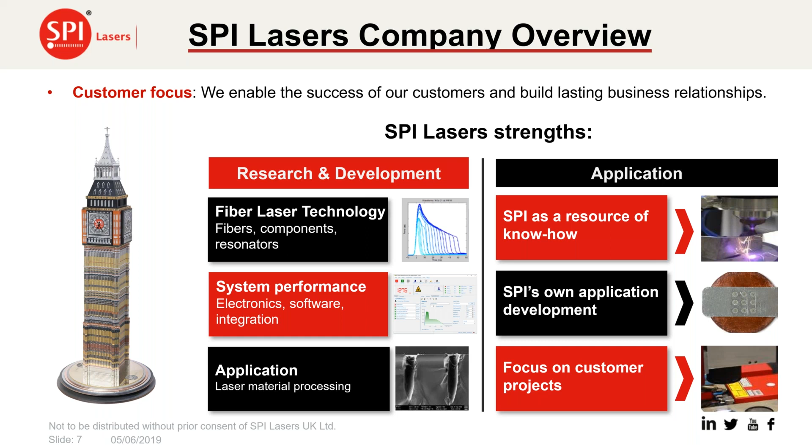Today, we're going to be focusing on the CW side of the business. There's also another large part of SPI's business which looks at pulse lasers, mainly for marking and engraving. But here we're going to be looking at the CW side of the business, particularly where we're focusing on cutting, welding, additive manufacturing, and some micro machining.

And the QUBE product range, which was introduced in 2017, has got a number of parts to it. We've got water-cooled lasers from 300 watts up to 2 kilowatts in a 19-inch rack format, and then air-cooled lasers in a similar format from 100 to 500 watts.

But when we go to a floor standing cabinet, we can take the power levels from 3 kilowatts up to 10 kilowatts in our current product range. And just as a starting point for what we're looking at today, we have always made those lasers with a number of different fiber diameters, and the different fiber diameters have a slightly different beam profile coming out of them inherently, and also a different beam parameter product, which I'll just mention later on.

So we've already had lasers with a fixed beam parameter product, but one that could be selected from the range that was available as options at the time the laser was purchased.

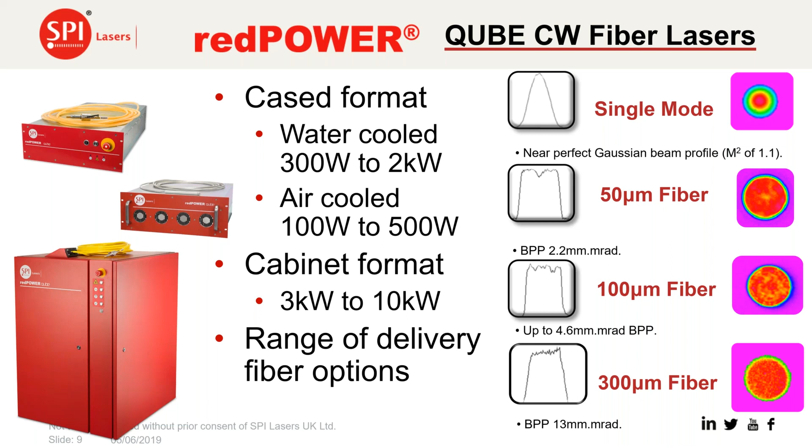So some of the advantages that differentiate our laser maybe from other ones. When we look at the higher power lasers, then we have an inbuilt pierce detection feature inside the laser. Pierce detection, when you're cutting, allows a real increase in productivity, something like 10 to 15% against a system with no pierce detection.

We have built back reflection protection as standard into the beam delivery fibers that we use with our lasers. We call these PQ. They're a QBH compatible mechanical fit, but with extra features to give this enhanced back reflection protection.

Inside the lasers, we also have pulse generators, so we're able to do pulse shaping and high-speed modulation, which allows a lot of fine machining and also gives great control over welding applications.

As I mentioned, we have got a range of mode profiles or beam profiles from the delivery fibers, so there's already a choice, a fixed choice, to optimize the process performance. And what we're looking at now is an option for real-time selection of the beam profile.

Finally, on the high power lasers, we also have a low power mode, which sounds a bit strange. When you've got a 6 kilowatt laser, you might want to cut something out and then mark it just with a part identification. At high power, you normally can't control the laser low enough to allow that marking, so we have a special feature that allows it to run stably in a very low power mode, and that's found to be quite useful.

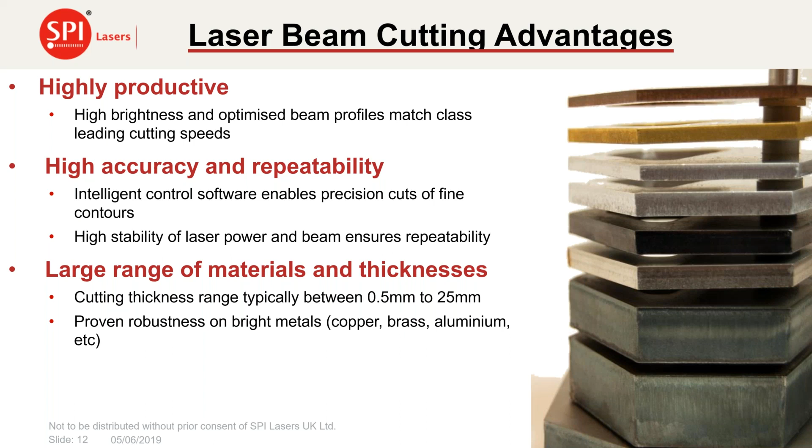Why do we want to use the laser for cutting? Well, first of all, the laser has a number of advantages when used in cutting, and most of these are now well known, and lasers are fairly ubiquitous in laser cutting applications. But they allow great flexibility to address a range of materials and thicknesses of those materials, so that the laser is becoming very well used.

And that's really a point which we're going to come to more and more through this discussion today, that what is a good cut, and what is the limit to your cutting capability, depends a little bit on how you define the edge quality that's acceptable for your process.

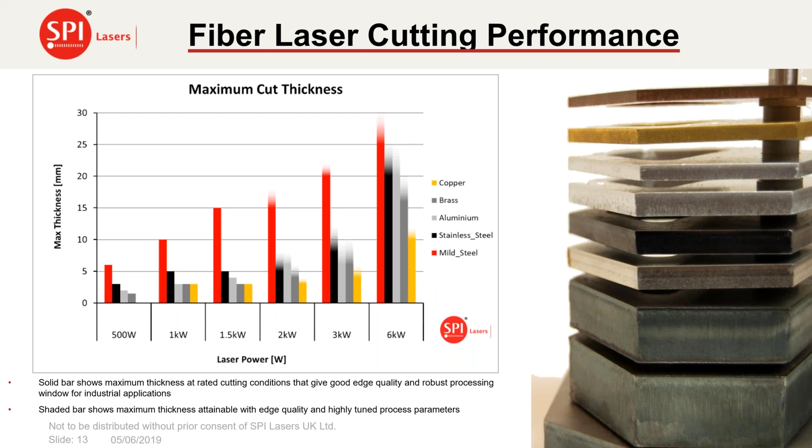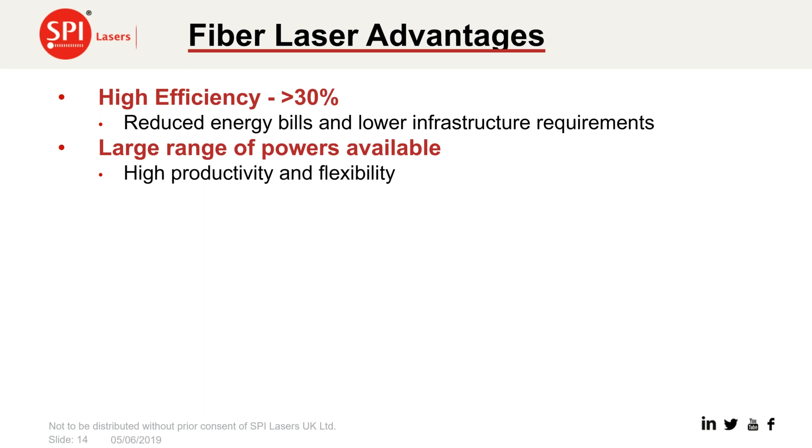But fiber lasers in particular, coming into cutting, give us, compared to other types of lasers, really high efficiency. If you think about a neodymium YAG laser, that would be about 3%. You may get up to 10% with a CO2 laser in terms of efficiency, but a fiber laser is easily at 30%. We've got now a large range of powers. As we looked at, we can go up to 10 kilowatts and higher now, but yet there's still lasers down at 100 watts.

Fiber optic beam delivery is very good for integration. It's flexible and easy. And obviously with a fiber laser, it's kind of inherent in that the beam starts off in a fiber - you might as well keep it in a fiber all the way through to the workpiece. And we can get some very good beam qualities. We saw earlier that it's possible to get single mode lasers at the diffraction limited performance, and now those lasers are up into the kilowatt regime, but yet they're still quite small compared to some of the older types of lasers.

The fiber lasers have a much smaller footprint and fit much more easily onto shop floor environments. And the operational costs are low for a fiber laser - there's no gases being used up, no flash lamps to replace. And these days the capital costs are dropping as well, so there's a very good business model for using a fiber laser in very many applications.

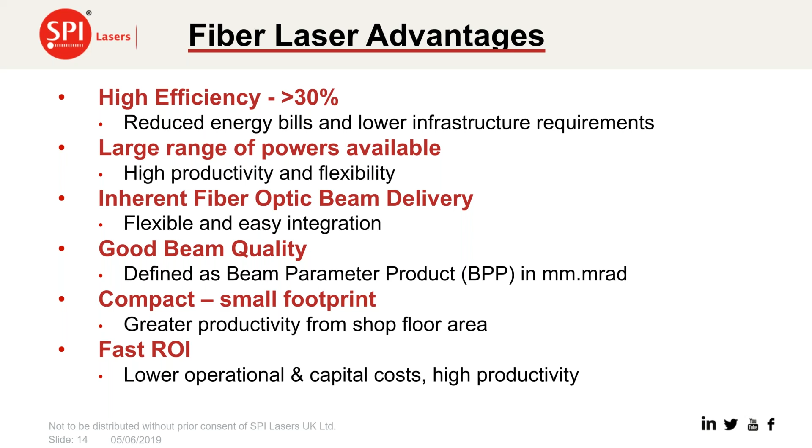But in terms of laser cutting, the perceived wisdom was that CO2 lasers would be the laser of choice. They've been used for many decades for high power metal cutting, although recently fiber lasers have been encroaching on their market, and it's about a 50-50 split between CO2 lasers and fiber lasers, probably just slightly in favor of fiber lasers - more of those are going out on new cutting systems. But fiber lasers give a cutting speed advantage over CO2 for thin materials, but were not considered to give a very good edge quality in the thicker material.

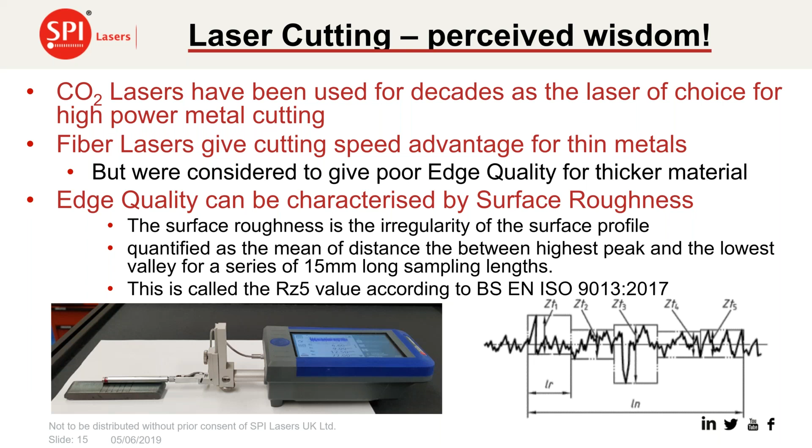So we did some work looking at different thicknesses of material and trying to cut them in the best way with various beam qualities, various beam parameter products of the laser.

The beam parameter product for a laser beam is given as the product of the diameter of the beam at its waist and the far field divergence, and that's something that's called the beam quality. The BPP by convention uses the radius of the beam and the half angle far field divergence, and because it's the multiplication of a distance in millimeters and the divergence in milliradians, the units are millimeter milliradian. So as you go to a beam with worse beam quality, the number gets bigger, and better beam quality, the number gets smaller.

So a diffraction limited beam for a fiber laser would have a beam quality, a BPP of about 0.35, something like that.

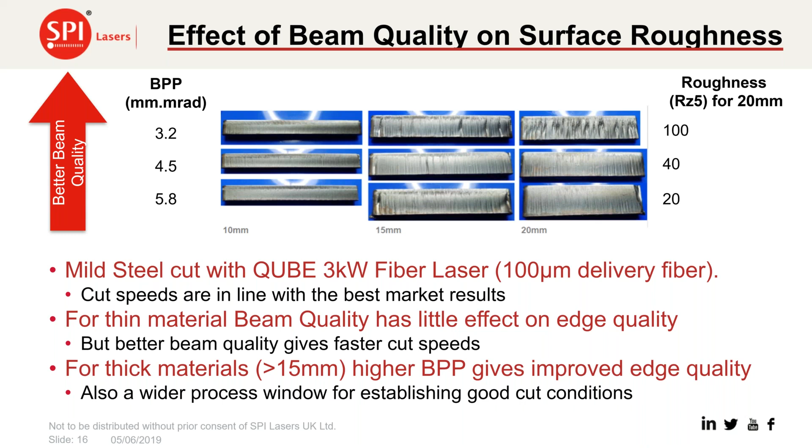So this is the key result that we want to start with as we think about variMODE: as you increase the BPP, you can get a much better edge quality when cutting thick section mild steel in particular. And actually it works in converse for thin materials - you can cut slightly faster when you've got a lower BPP.

But this effect is really, as we've looked at in our results, very much linked to the actual BPP, so that even when we keep a constant spot size on the workpiece, we still see these results - as the BPP increases, the edge quality gets better. So it's not just to do with the spot size on the workpiece, it's certainly the effect of the divergence coming into this as well.

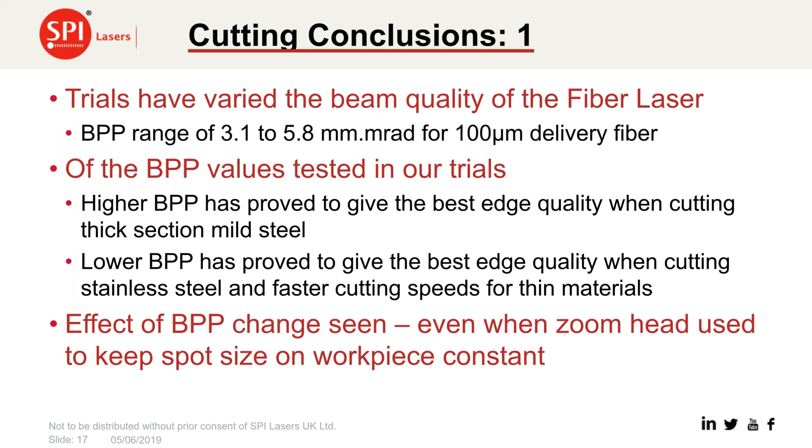If we look at those values and plot them on a graph, we can see there's a step change in the roughness, around about 4.5 millimeter milliradian, and maybe there's a slight ongoing improvement in the roughness as you take the beam quality up above that. But what this would indicate is that with a simple high BPP, low BPP change, we can access the improved edge quality for thick materials and yet still have the ability to cut thin materials with the performance you get from a low BPP laser.

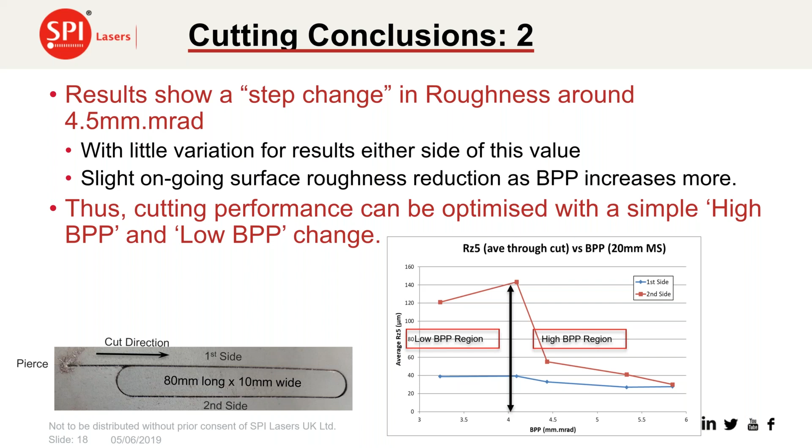So we want to introduce now variMODE as a feature of the laser that will allow it to take advantage of these two different processing regimes.

And just by way of background, there's quite a lot of patent technology out there about cutting with different beam profiles. Two areas that have been looked at are shown here. One is where you use different laser modules with a beam combiner to combine them into different areas of a delivery fiber, into the ring or into the core or into a cladding ring, or alternatively you use some other method or mechanism for steering the beam across the end of a fiber with different delivery regions, and those produce a change in the spot size coming out of the fiber, and also a change in the beam profile on the end of the fiber itself.

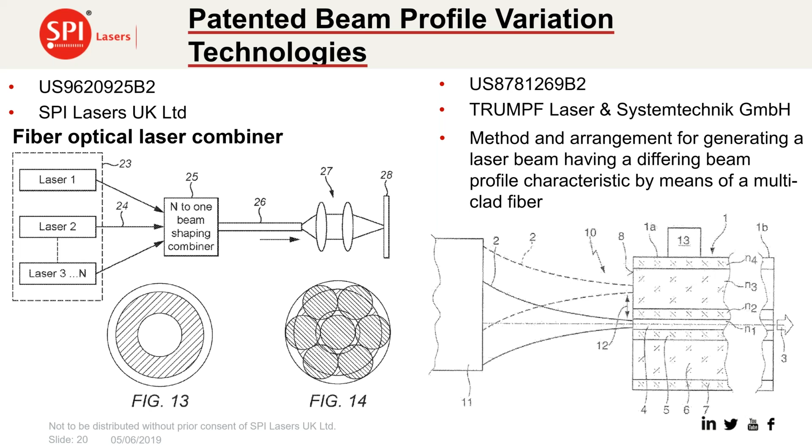But variMODE, we're introducing a novel approach to changing the beam quality of the fiber lasers, in that all the energy for the variMODE laser remains in the fiber core, and none of it goes into a cladding ring, and therefore we have no need for special profile delivery fibers. The standard sorts of delivery fibers work very well, or are all that are needed for variMODE.

We've shown variMODE can work across the whole of the current power range of our lasers, up to 10 kilowatts, but that it has capability to go even higher than that as needed.

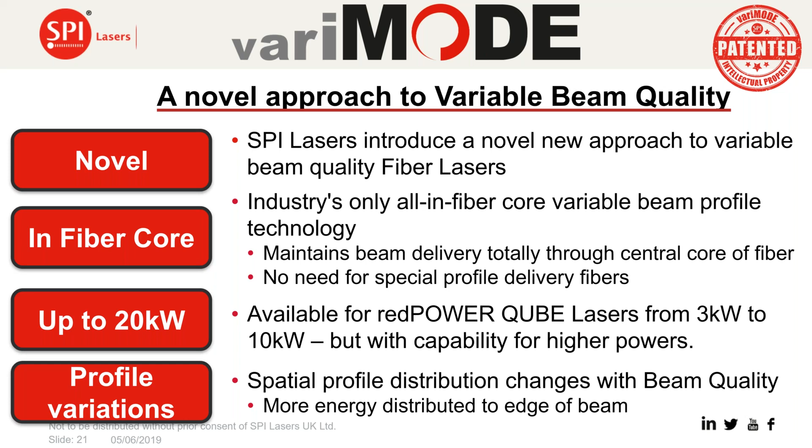The main difference about variMODE is that we've been looking at changing the beam quality, but we do that through changing the spatial profile distribution within the fiber core, so we have more energy moving out to the edges of the beam. This is the sort of change in beam profile we're looking at for variMODE.

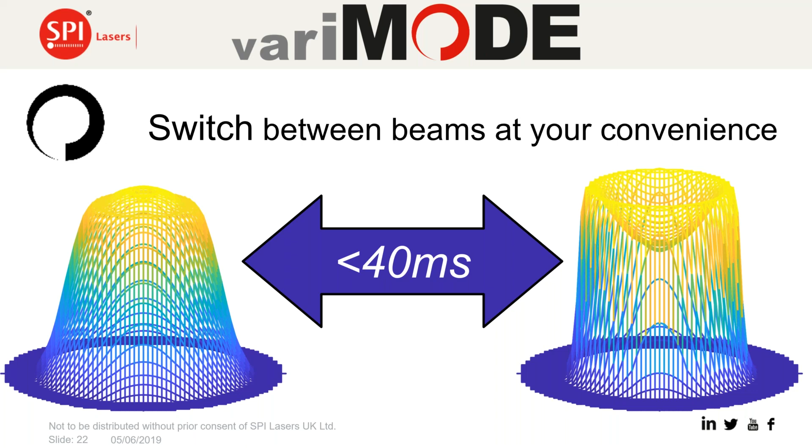We're moving from a cone-shaped beam on the left-hand side, and then we can switch that in a short time, less than 40 milliseconds, to more of an annular beam with steeper sides, where the energy has been pushed out to the edges of the profile. This switching can be done through control of the laser, and we find that the cone-shaped beam with a low beam parameter product is optimized for fast cutting of thin metal sheets, particularly those with highly reflective materials like aluminium, copper and brass. It's also very good for high quality piercing in thick sheets, which we'll look at later.

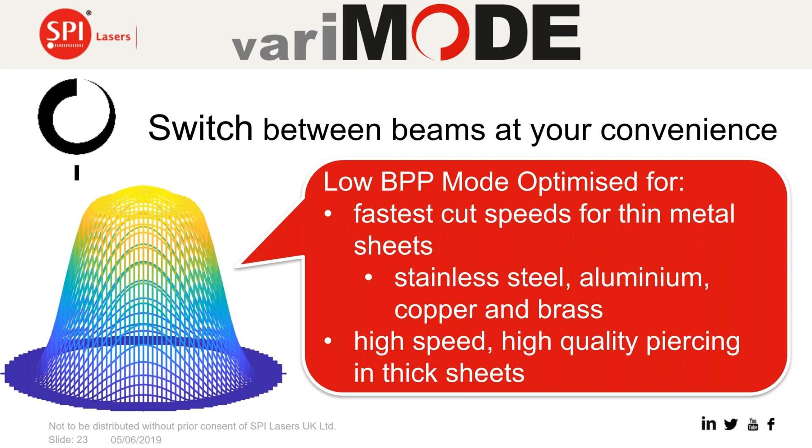Similarly, for the high beam parameter product mode, that's very good for good edge quality on thick sheets, and it cuts through very well. So before variMODE, you had to make a compromise.

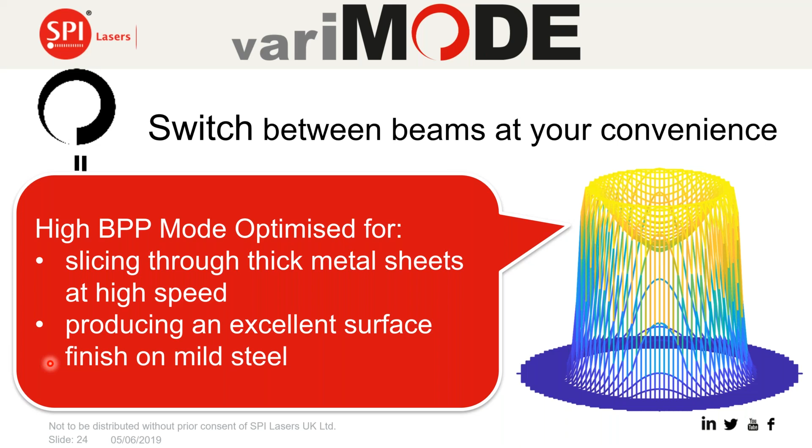If you had a range of fiber options available, you could choose a high beam quality, low beam parameter product number if most of your work was cutting thin sheets, but then you'd struggle cutting thick material. Or you might have chosen something optimized for cutting thick sheets, but then when you came to cut thin materials, your productivity would be down because you weren't cutting as fast. This is where having a variable beam parameter product really helps - you're able to optimize for both processes and you haven't got to make the compromise.

So you might think, what's going on which is allowing this change in the processing? It's inside the laser itself that we make the difference to the beam and have the mechanisms which change the output beam through the delivery fiber. But keeping all the energy within the core means that divergence changes at the output of the fiber.

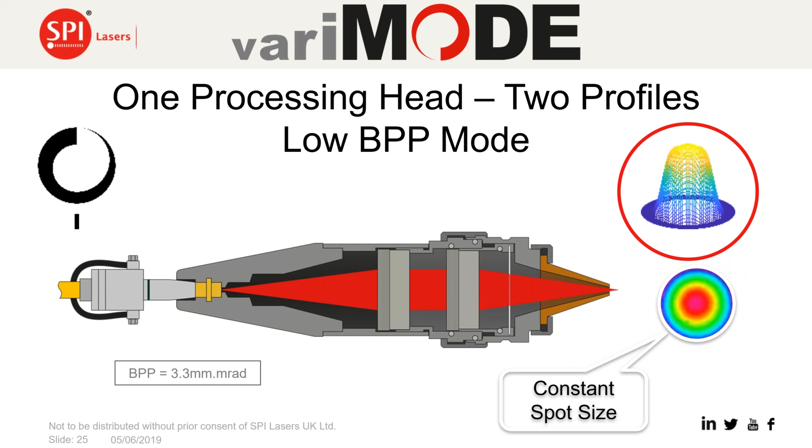That's what this graphic is trying to show. Here we've got our low BPP value, something like 3.3 millimeter milliradians, and the beam forms a narrow beam through the cutting head, giving this cone-shaped output in the focal plane. But if we change to the higher BPP value, we get a larger beam through the cutting head, a bigger cone angle coming down to the focus spot, but the actual focus spot diameter is roughly the same, with more of the energy pushed to the edge of the beam.

The top level of BPP we've set at around 5.5 millimeter milliradians, which allows it to match the acceptance angle of most standard cutting heads, around 0.13 NA - that's the total energy of the beam. Usually when calculating the BPP, we use a measurement which encloses 86% of the energy, so there's a little allowance that has to be made on top of the calculated angle from the BPP to encompass the whole beam, and that's the number that needs to fit through the cutting head, as shown in this simple graphic.

Let's have a look at some of the results.

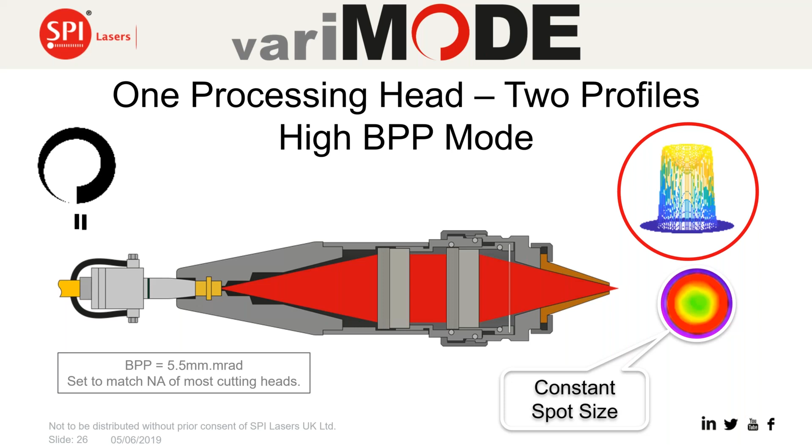First, we looked at cutting thick steel with our high BPP value. Usually when trying to cut thick steel, if you try to cut out fine features, such as this little strut at 2.5 millimeters wide, it's very difficult because you tend to get heat build up from one side to the other, leading to a lot of melting once you've got such a thin piece of material. But we're finding that with the high BPP, you can get a lower level of heat input into the material, and these fine features can be cut out.

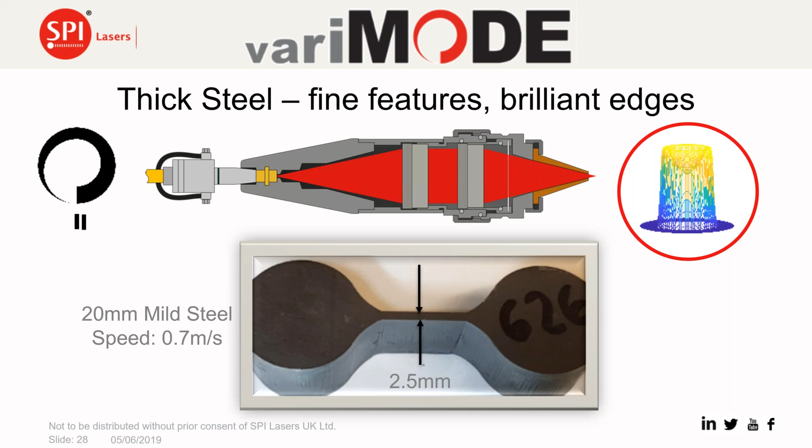If we think about cutting thick materials, this is the comparison we wanted to make between the low BPP - where if we tried to cut it at a reasonable power level and speed, you can see the surface is not very smooth. If you look at the top of the cut, there's a lot of what we call nail file, that fine grooving, and then a number of gouges out of the material, leading to an uneven surface deeper down.

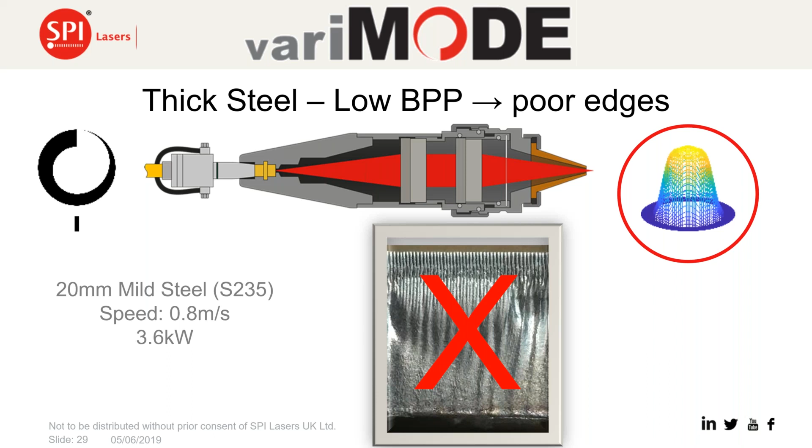That's because of some of the ignition of the oxygen that's used for cutting through the material. So thick steel cutting with a low BPP isn't really very acceptable, but if we can change that BPP with variMODE to a high value, you can see now that we've got a very smooth finish. There's a shorter length of that nail file, and it's much less pronounced.

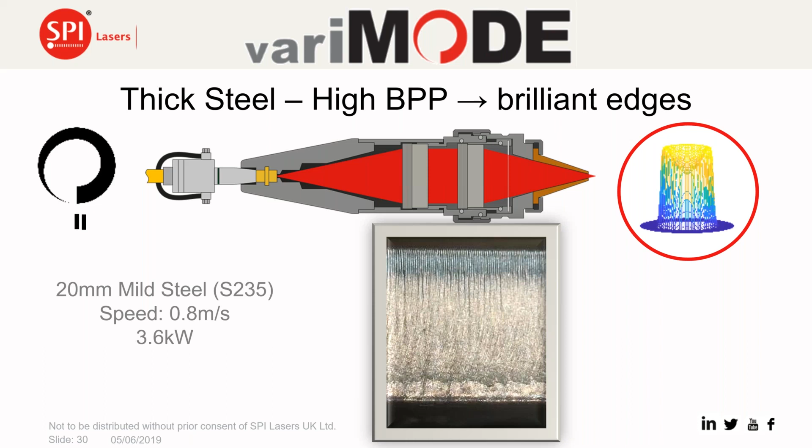The effect is that you get a very good surface finish using this very standard grade of mild steel. You don't have to use anything special, no laser grade steels are needed, but it's easy to cut and get a good surface finish with a reasonably wide process window as well, because that's the other thing, is the robustness of the cut.

How insensitive is it to variations in the material surface finish, bulk quality of the material, and any movements with the cutting system. And the high BPP here gives us a very robust solution.

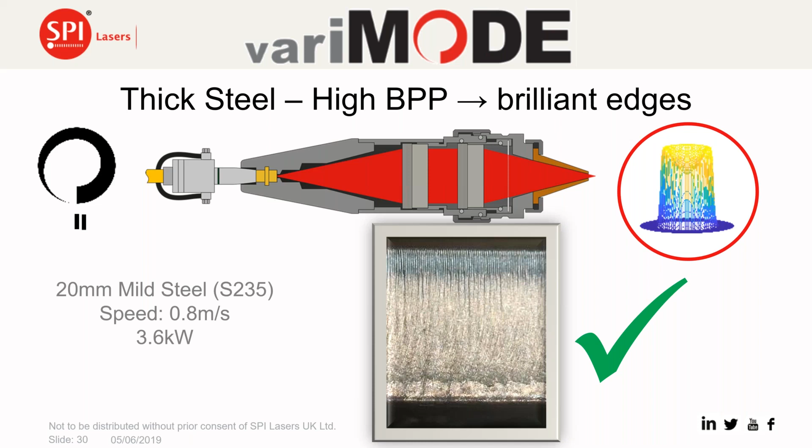On the other hand, as we said, we might want to use the cone profile with a low BPP, and we might want to look at cutting some thinner materials. And here at these power levels, the difference between thin and thick is sort of 10 millimeters or something. So when we talk about thin, we're not talking about foils, we're talking about materials in a few millimeter thickness range. So the cone mode not only gives us a faster cut, the better edge quality, but it also allows us to get less dross on the material.

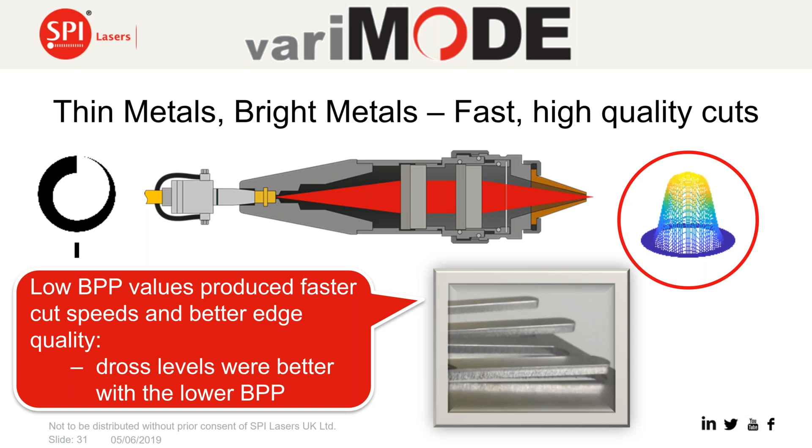So you might look at these cutting speeds if you're very familiar and say, well, maybe I could cut a little bit faster with that power and that thickness of stainless steel. So again, the results we're putting up here aren't necessarily the fastest ones, but they're what we call our production speeds. They're ones which have a reasonable process window and allow a fast setup time. So they're kind of the speeds that would be sensible to use in a job shop type application.

If we move to slightly higher powers, and here we're looking at what we can do with a 6 kilowatt laser, we can see that we have cut the 2 millimeter stainless steel significantly faster. But again, it's a significant improvement if you can use the cone-shaped profile with the low BPP value. And on a reflective material like brass, we were able to cut again at sort of 25% faster.

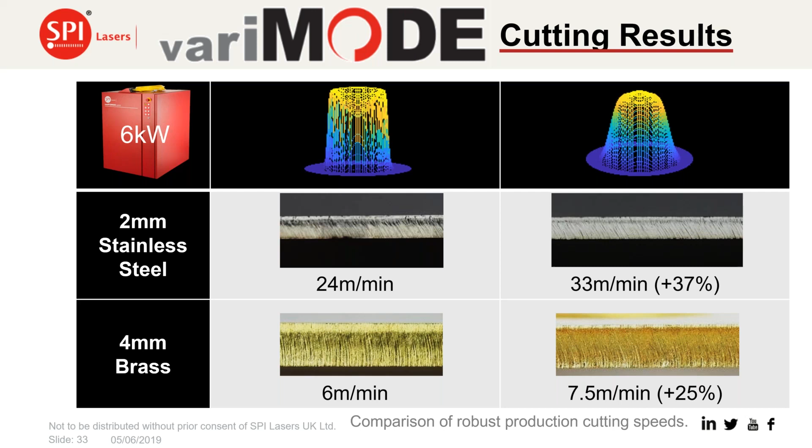And just on the next slide, we're going to watch that in action as we cut some shapes out of brass with these two lasers. So we're sort of looking at a side-by-side comparison of the two conditions.

So the top one is showing what we've called the low BP, the low beam quality, which is the higher BPP mode, and the bottom one has got the cone shape profile, so it's cutting faster at 7.5 meters a minute.

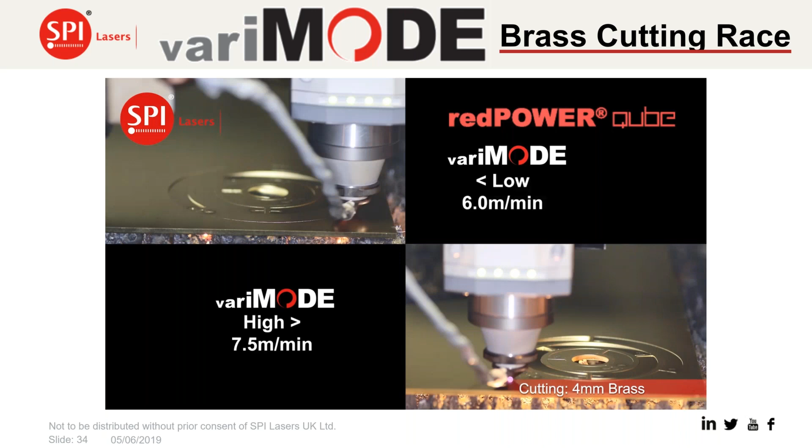So overall here, although the cutting speed, linear cutting speed, is 25% faster between the 7.5 and the 6 meters a minute, the productivity, if you like, is about 12% increase between the 47 seconds and the 42 seconds.

And that's because of the real world conditions that we're using there, like the jump speeds are the same. There's the time for piercing, there's the time for the acceleration and deceleration of the stages, etc. But, you know, even so, it's a good 12% increase in productivity. I think most of us would be quite happy with a 12% increase in productivity. We could probably work for an hour less each day if we could be 12% more productive. So there's certainly some advantages in doing that.

And then the other part of the story about variMODE is the piercing. Just going to start off looking at piercing in some mild steel. But, you know, as we know, when we're cutting, say, a large sheet out with many parts, many nested parts, there can be many pierces needed, which have to be done before each start of each cutting part.

Sometimes we can do those pierces on scrap metal, and it doesn't matter what the pierce is like, we just need to get through the metal. But oftentimes we have to do a pierce inside a good part, and we don't want to have a lot of spatter coming out onto the material.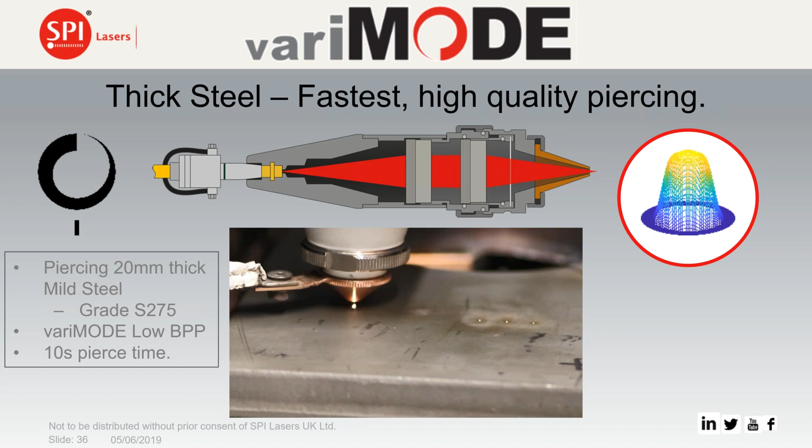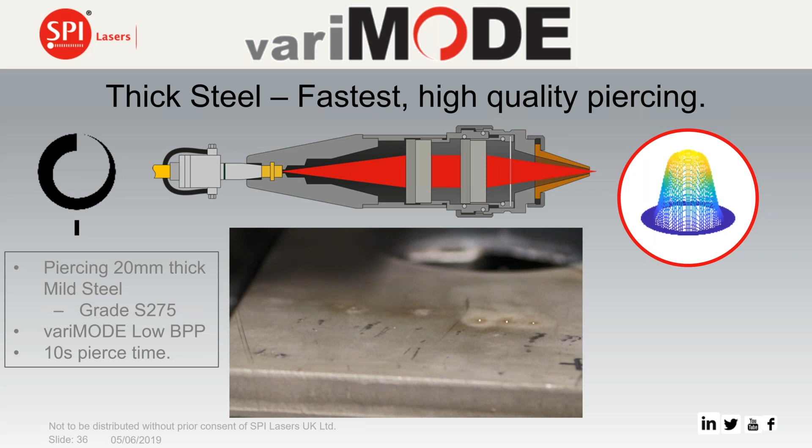Of the cut, you can see that, although there's some sparks, very little spatter is produced around the pierce. And if we look at those in a little bit more detail, you can see in the picture on the left that those pierces, taking place in about 10 seconds, give us a very small top hole and a very neat exit hole from the pierce.

When we tried to pierce the same material and get a good low spatter hole with the high beam quality, with our annular beam, we found a much more deformed hole with much more spatter around it. At 6 kilowatts we could do that in 18 seconds, but it took about 30 seconds when we did it at the 3 kilowatts we were using for the fine piercing.

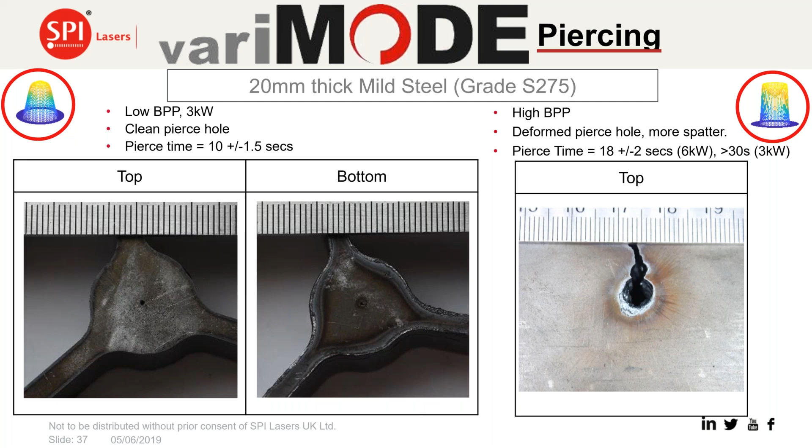So we find that with piercing, having a low BPP value allows us to pierce much more neatly and in a much faster time than we can do with just the high BPP mode, which is very slow and gives a lot of spatter. This really summarizes the advantage of a variMODE laser in cutting applications - even if you're only limited to cutting thick materials, you have the ability to do very neat, fast pierces before you quickly switch to the high BPP value and do your cutting at a good speed, getting a very smooth edge quality out of it.

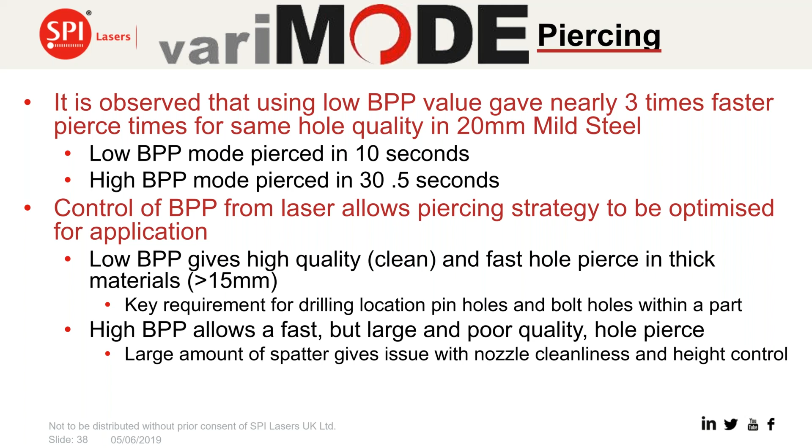And that's the main message on cutting, the advantage of variMODE. But there's more to it than that - it also has some effect on welding, and we haven't investigated this quite as fully at this stage, but we're looking at some initial results with a 6 kilowatt laser, again in mild steel.

We did some simple bead on plate welds, in this case about 5 meters a minute, and you can see that the two different beam profiles give us very different weld geometries - the cone shape gives us a narrower weld which is fully penetrating, but at the same speed the annular profile gives us a much broader weld and not so deep. Without having to change anything in the focus position or the optics, we're able to give one type of weld which may offer greater tolerance for fit up in a butt weld, and the other which may give deeper penetration, better for some overlap welding applications.

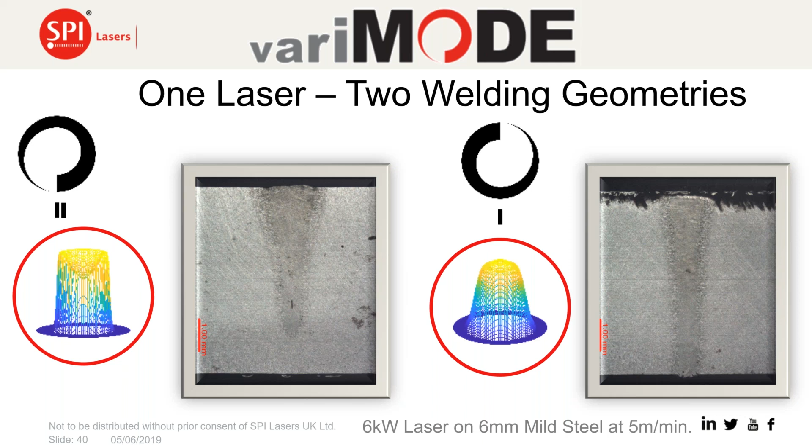So it tends to show us that variMODE laser allows us to be very versatile in our applications. Let's have a look at what it brings us overall. First of all, it's no good having a very good quality feature if there's no way to control it. Fortunately with QUBE lasers we have a very good control system called FiberView, and we've been able to integrate variMODE into the FiberView interface.

We can control it either through the built-in pulse shapes of FiberView, or through a digital input onto the machine control interface. The good thing about the machine control interface on FiberView and the QUBE lasers is that it's configurable - there are 7 inputs and 7 outputs, but about 30 functions that can be chosen to fit onto those hardware pins, allowing different configurations of the lasers to be controlled to match the choice of the system integrator. So there's tight integration of the control of variMODE into the laser.

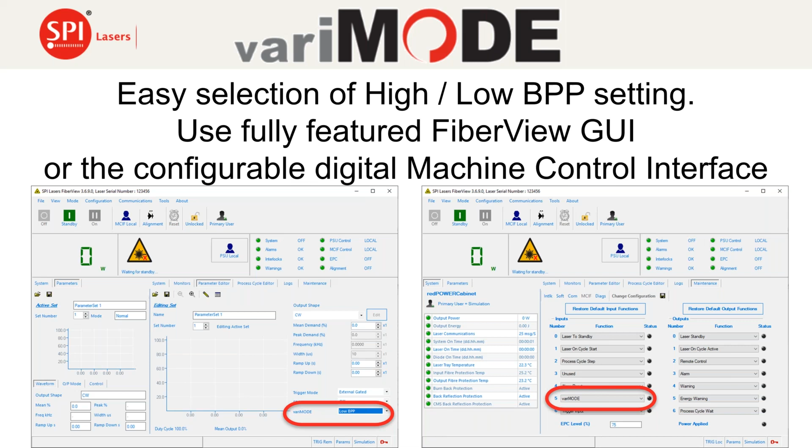In summary then, we've got beam profiles which we can tailor for the application, thin and thick materials, both for welding and cutting, and not forgetting the advantages for piercing. When we look at thin materials, we're able to give ourselves a very fast process speed and still maintain good cut quality. At high thick materials, particularly mild steel, the emphasis is on good cut quality while maintaining a reasonable cutting speed. The difference with variMODE is that it's all in fiber core technology.

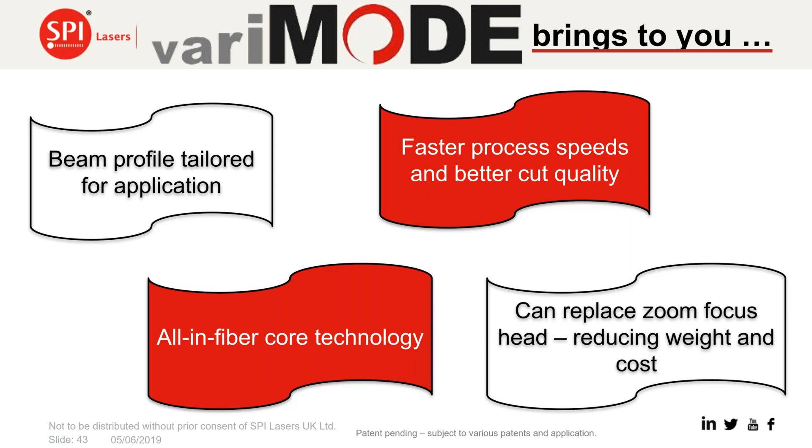We don't need special delivery fibers, and the setup is all done inside the laser itself. Because we've got this difference in beam divergence coming out, if we're in a defocus range, we can change the spot size without having to use a focus head if we want to. So there are some applications we've looked at where we can vary the spot size by defocusing a fixed amount and keeping that fixed - the spot size will change if we change the profile.

One of the advantages, or one of the differences, we looked at for variMODE is that it's all in the fiber core, and the whole of the power of the laser is available in that fiber core for any of the profiles that we use.

If we think back to one of the earlier slides when I was talking about other IP that's out there, if you splice different modes onto the core and cladding of a fiber, then the power you get depends on the ratio of those modes into the different positions on the fiber. But that's not a limitation for variMODE. All the power is available for all the profiles.

Because this is done inside the laser, you don't need any extra optical components. There are no steering beams or anything like that, which could increase the complexity of your system and the risk of damage through optical contamination.

We've got better flexibility for our systems. If we don't have to think about building a system just for cutting thick material or just for cutting thin materials, we can build one system, and by varying the laser, use it across a wider range of applications.

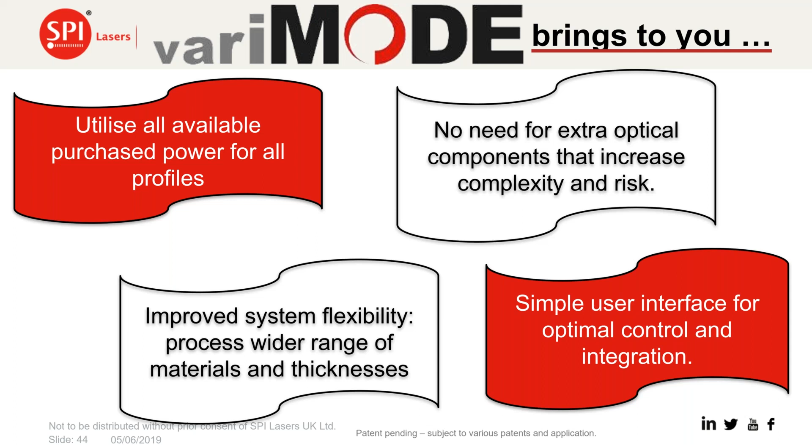But we don't want to stop just there with variMODE. We think there's more things that could be coming with it. So we've been looking at the next generation, which we're calling variMODE Pro, and that's kind of waiting in the wings. So as I talk a little bit about that, which is quite exciting, I need to just go through a bit of physics, hopefully not too much, to highlight where this is such a radical new technology.

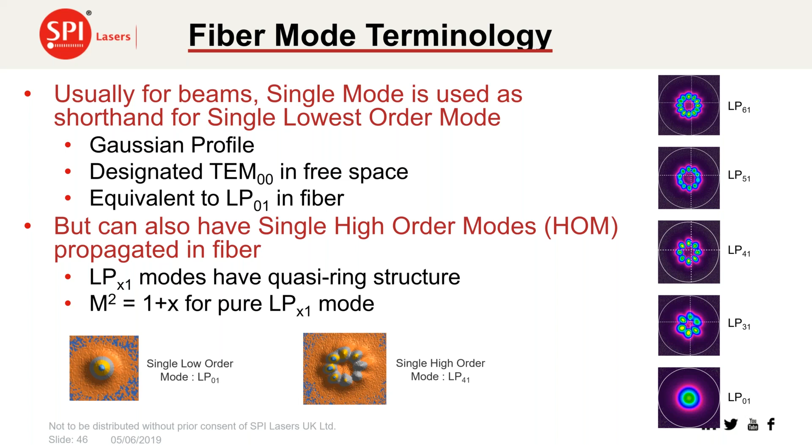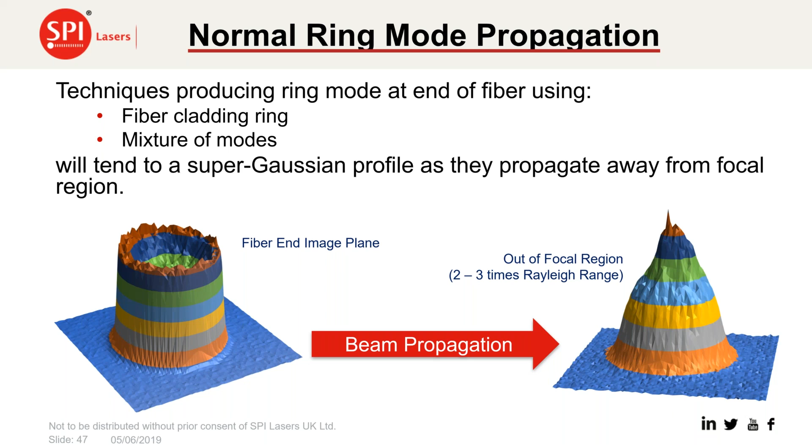But the difference with these modes is that even though you propagate away from the focus, you still maintain that lobe structure on the system.

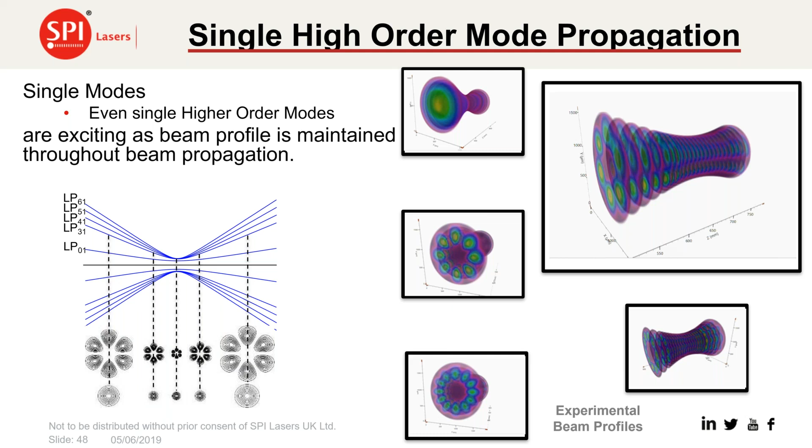So what these are showing is some experimental results, taken from a beam profiler, which has taken slices of the profile at a number of places through the focus. It's trying to show that as you go from one side to the other, that ring structure with 6 lobes maintains constant throughout the focal position of the laser.

This means you'll be able to process out of focus but still have the ring structure, and that's something none of the existing systems can do. Even if they produce a ring at the end of the fiber, by the time you're out of focus—and remember, for a lot of focusing and cutting applications, you're cutting out of focus with the focus either inside or above the workpiece—where the beam interacts with the workpiece isn't a ring. In this case, wherever you look, it would be a ring at the center of the workpiece, giving you all the advantages of that energy distribution for a smooth profile.

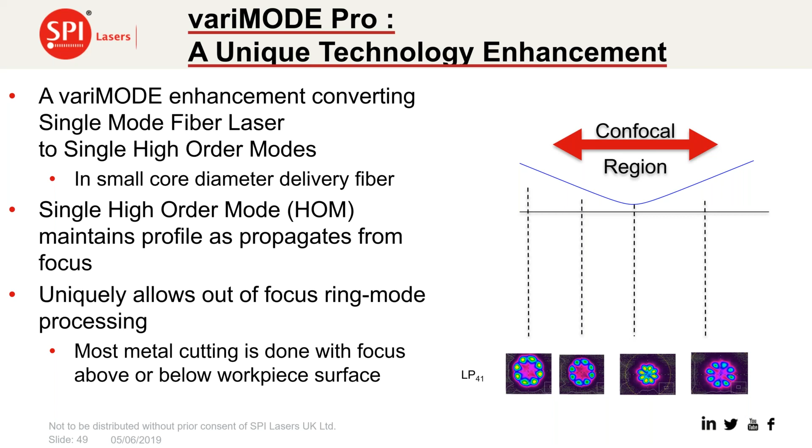We've just done some very quick results looking at welding—bead on plate again. We've kept a constant power density on the workpiece and changed the beam quality from single mode up to a beam parameter product of about 2.3. This is coming out of a smaller diameter fiber than we were looking at for the previous variMODE work, which was 100 micron—this is smaller than that.

We've been able to show that by keeping the power density constant, we can change the width of the profile of this bead by a factor of 2.6 times. These are just preliminary results, but the penetration is maintained because we've kept the same power density on the surface. The difference between this and normally defocusing is that because we've kept the same power density on the surface, the penetration hasn't varied as much as it normally would.

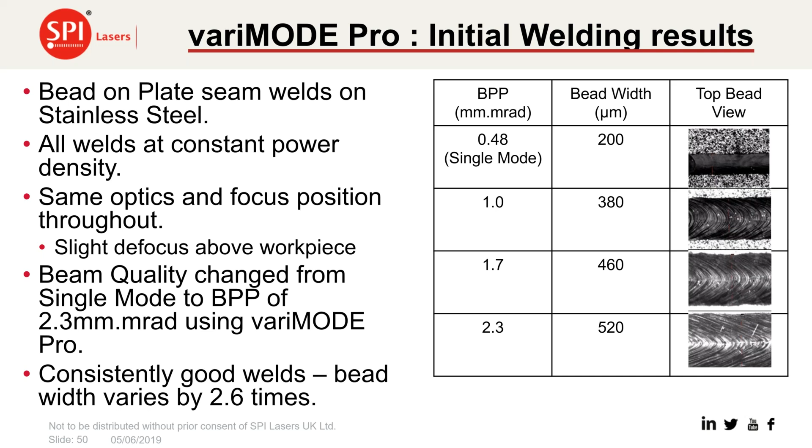So this is interesting new work that's going on, and it's still in very early stages, so we're not saying too much about it at this stage. But it's just to say that with variMODE technology, we're starting from a point that's already bringing advantages to customers, but we've got more areas that need exploring, and enhancements will be coming along in next generations.

So just to tie it all up a bit, I want to summarize some of the advantages about fiber lasers, and particularly about variMODE.

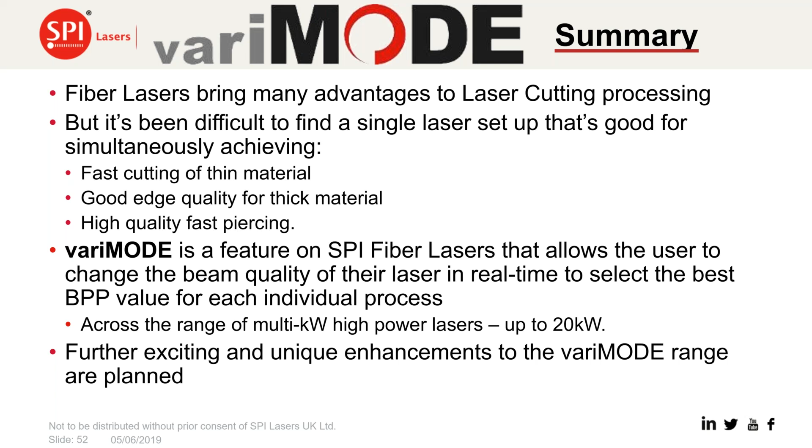Fiber lasers have many advantages for laser cutting processing, but it's been difficult to find a single laser that's good for all types of laser processing related to cutting. So SPI Lasers has introduced variMODE on its QUBE fiber lasers, which allows the user to change the beam quality of their laser in real time to select the best beam parameter product and profile for individual processes. That's available across the whole range of high power lasers. Although this is already bringing good results, there are further advantages planned for the future.

When we talk about variMODE, we mean an all-in-fiber core technology that allows us to use a standard delivery fiber. It means we can use all the power of the laser that's been purchased in any of the modes—we don't need to predetermine the maximum power in each mode. We're changing the energy distribution, not the power density. So at focus, we've got roughly the same spot size whichever beam parameter product we're using, but we've changed the energy distribution from a cone shape to more of an annular shape.

We can do the switching in real time, so if you've been doing a pierce and then a cut, you can pierce, and in the time it takes to move the head to the cut height, you can have switched to the other beam profile. So there's really a very flexible approach to beam parameter variations for fiber laser cutting and welding applications.